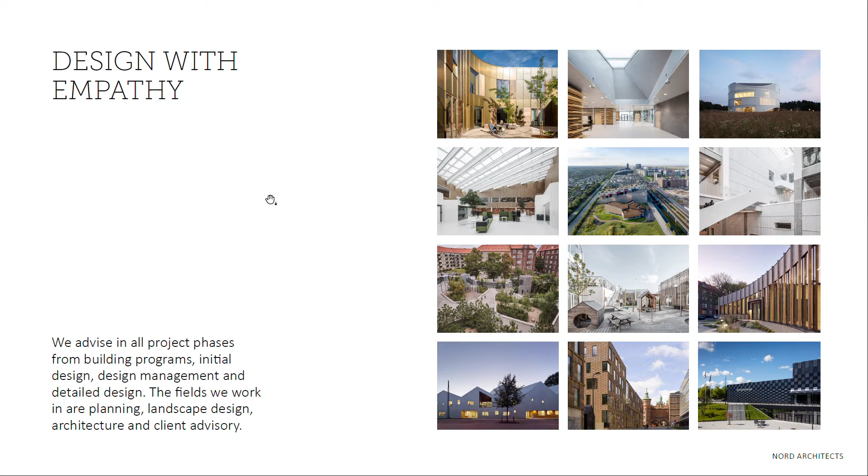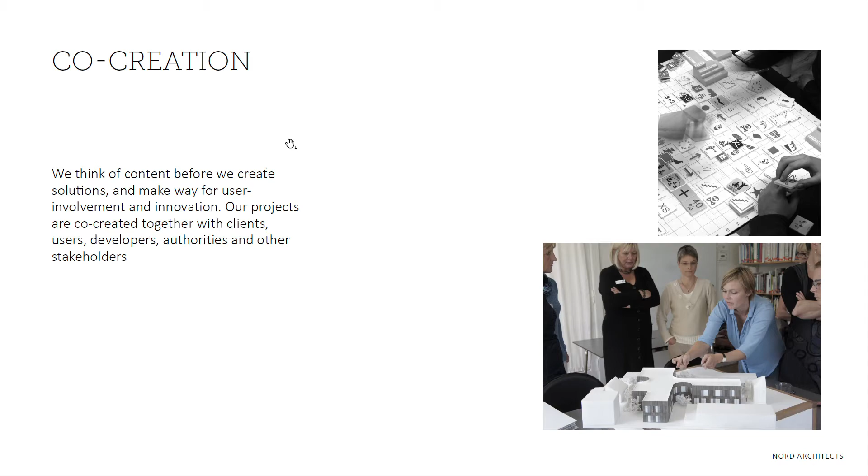We're a company based in Copenhagen, Denmark, and we try to design our projects with empathy. The way of doing that is that we try to involve stakeholders, users, relatives, organizations in the design process, and we developed special methods and tools to cater that process.

Denmark, small country in Scandinavia. We are a country with a strong public sector, and when you see what we spend our money on in the Danish society, it's mainly within the healthcare, education, and social sector. So it's within these fields that we feel it's a huge potential for doing architecture and new innovations.

Especially because when we see the aging population in Denmark and globally, we have to find new ways of catering our welfare services, building in new ways.

What's pressuring the welfare state at the moment is many factors: globalization, climate change, changes in demographics, but also a greater expectation for public and individual welfare. So the traditionally Scandinavian welfare model, where you have a strong public sector at the top and a private sector and a civil society, is gradually changing now into new alliances and new partnerships.

Also, when we see the architecture for the aging population, especially COVID-19 have sort of emphasized the need to do new innovations within the field.

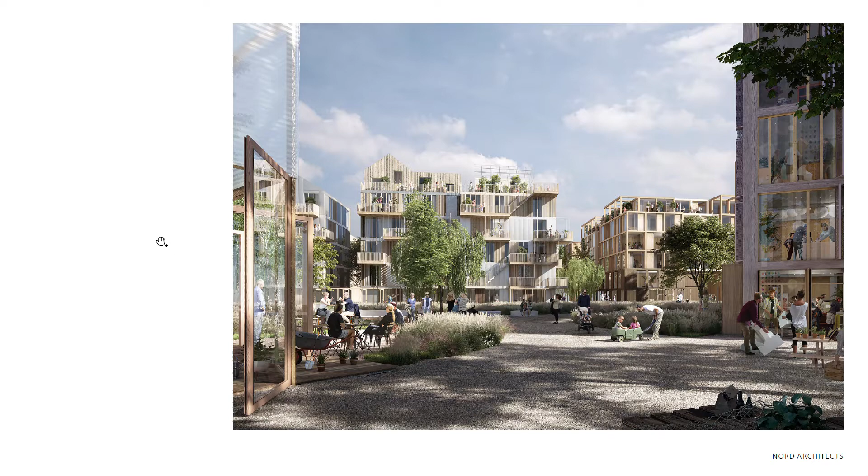And when we do urban planning or neighborhoods, we try to plan for intergenerational housing and also a plan layout that are age friendly and age integrated.

So we'll start telling about some projects which we call centers of excellence, that are meeting the demands of an aging population in different ways.

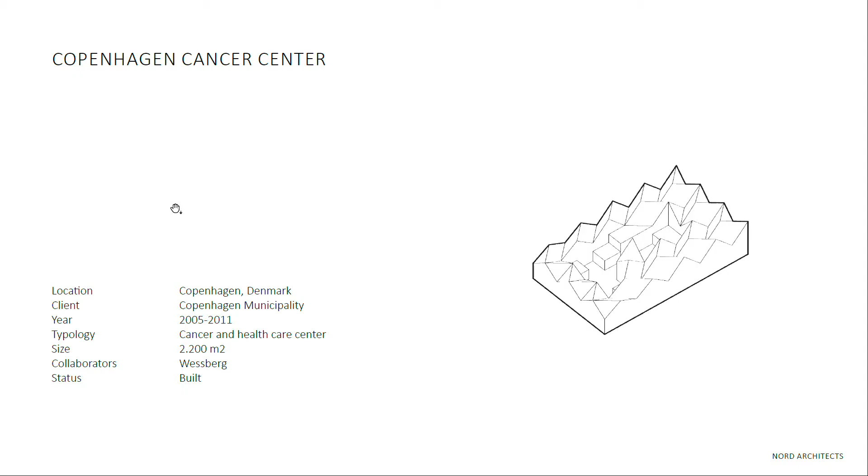The first project is one we made in Copenhagen, which is a health and cancer center. It's a result of a healthcare reform in Denmark in 2007, where rehabilitation processes were taken over by the local governments and municipalities. So this center here is providing the rehabilitation and training for elderly and cancer patients.

But what's interesting about it is that we have also outdoor facilities for training and recreation, but they are also accessible for other communities and neighbors and kindergartens and so on.

The center itself is an example of a new partnership between public, civic, and private sector. You have a long range of private enterprises doing counseling and so on. You have the municipal that are responsible for the rehabilitation, and you have a lot of people working volunteer from the civic society.

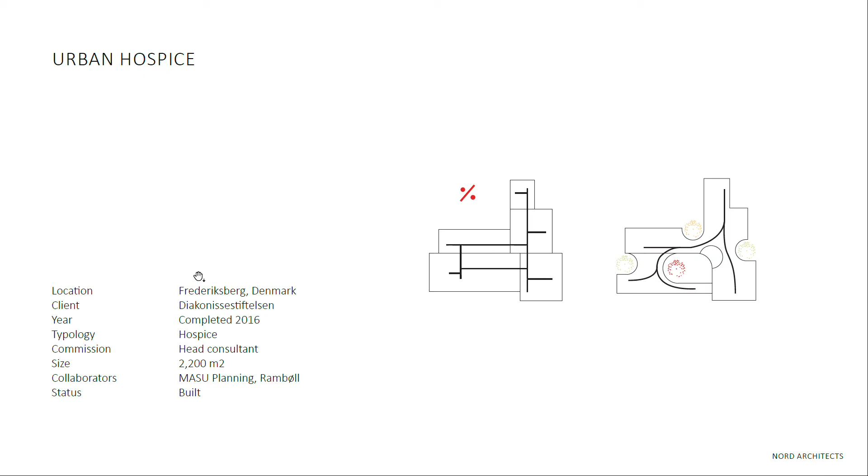Same thing for the next project, which is an urban hospice in the center of Copenhagen, which again takes the stigma out of the last days in your life, so that you can actually be in an urban setting at a villa road, and be close to your relatives and being met with dignity.

So this is also a result of these small centers of excellence that are popping up in Denmark.

The next couple of projects show another tendency in Denmark, where you see you cluster different functions together.

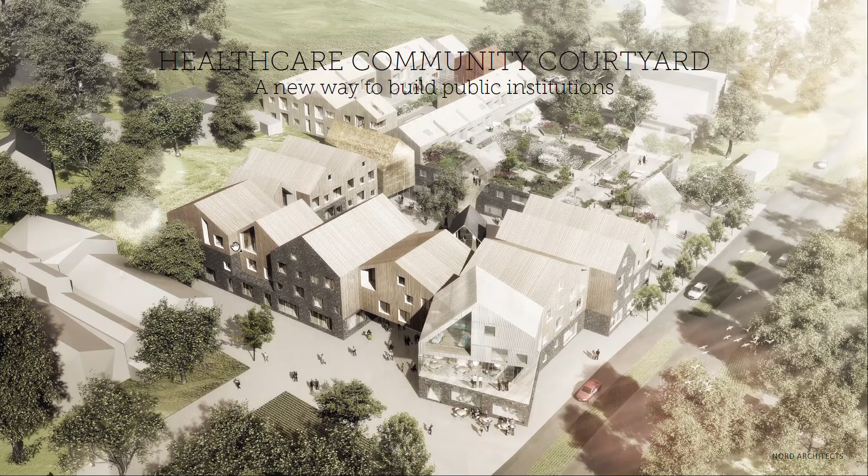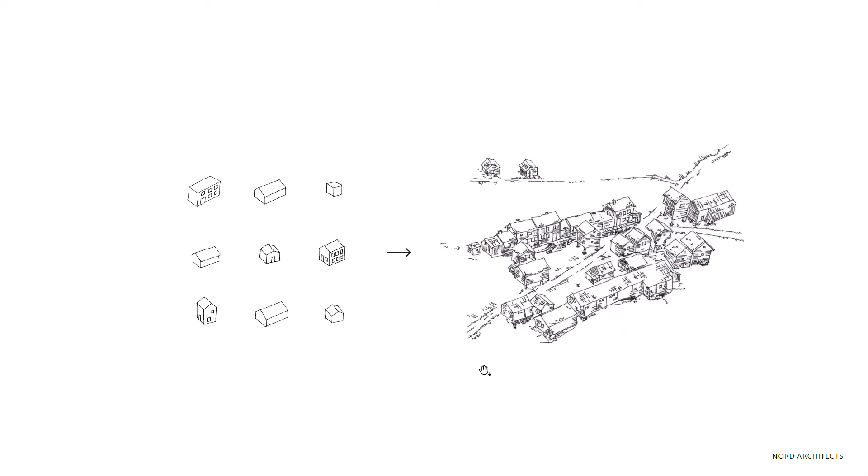This is a project actually in Norway we are just finishing, which contains long-term care homes, a doctor center, dentist center, childcare center, and so on. So it's an integrated typology with the city, where we were inspired by Norwegian typology of cluster houses, but we designed it like an efficient modern institution.

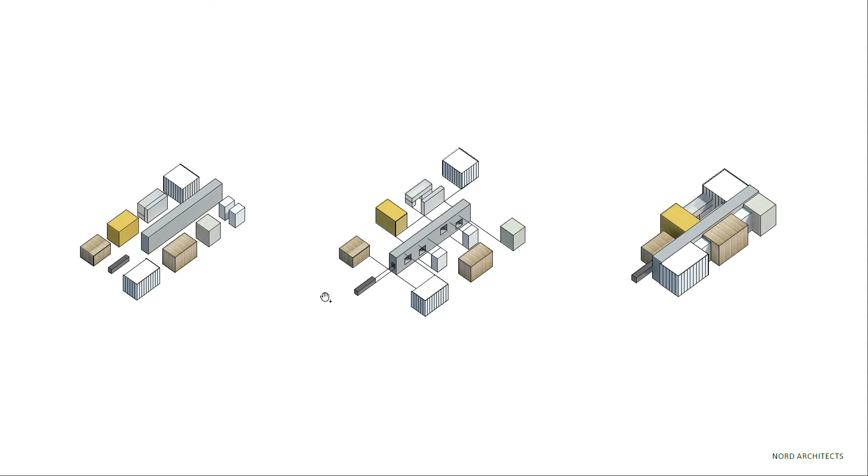So again, the architecture here in this low budget project is emphasizing the different functions that are meeting different demands, and also sharing facilities and creating professional synergies.

This is also a project in Norway that is also trying to combine different needs for the local area.

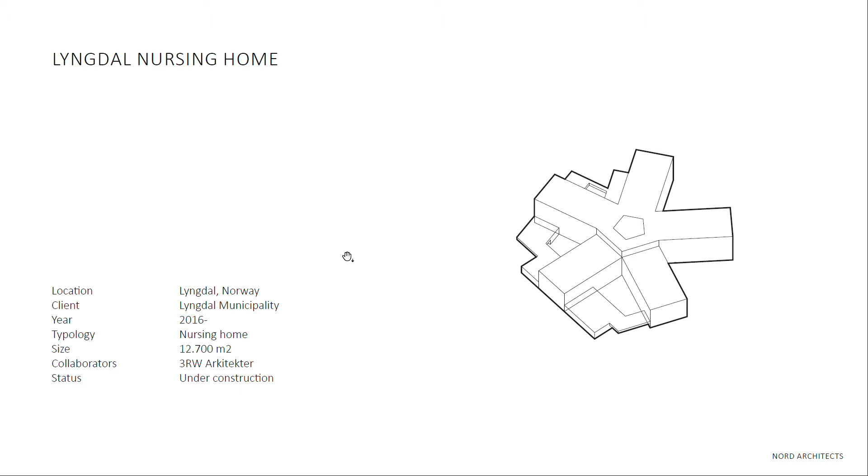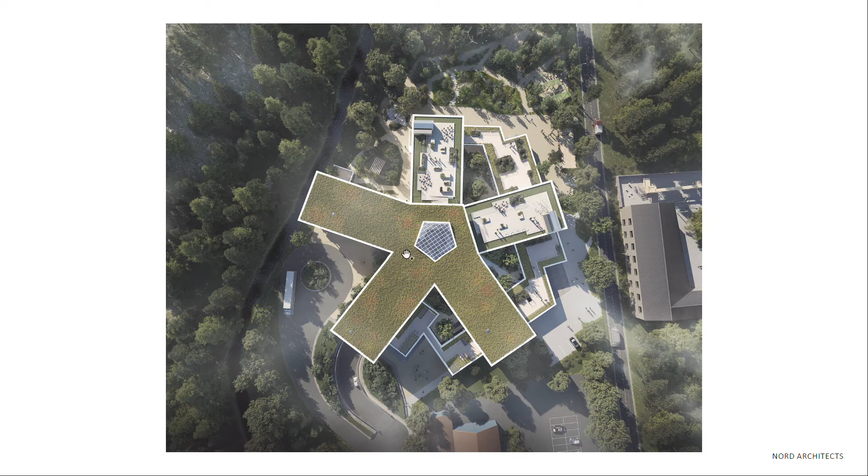So here you have a star-shaped building with a central atrium, where we have two branches here for dementia patients, two branches for normal long-term care units, and then you have one for senior housing, more fit elderly that can stay here.

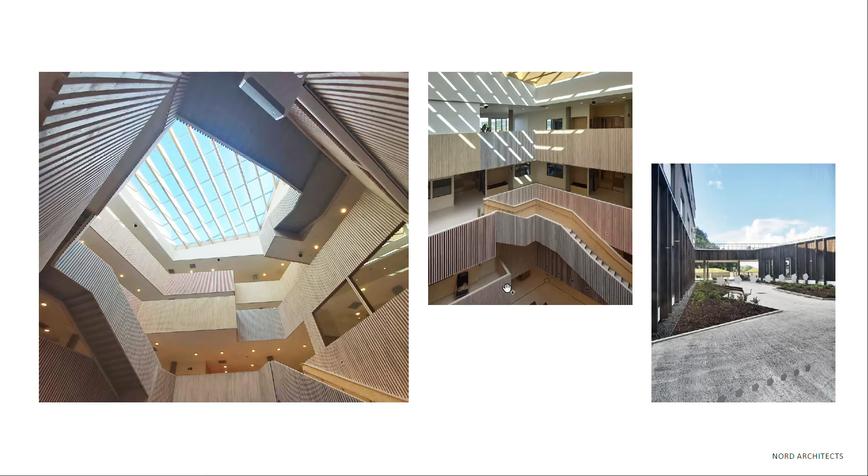This is also a project that is just recently finished, so these are fresh images from the site. As you can see here, enclosed courtyards and courtyards on rooftop terraces and so on.

Another tendency is that we see a lot of senior communities are being built in Denmark at the moment.

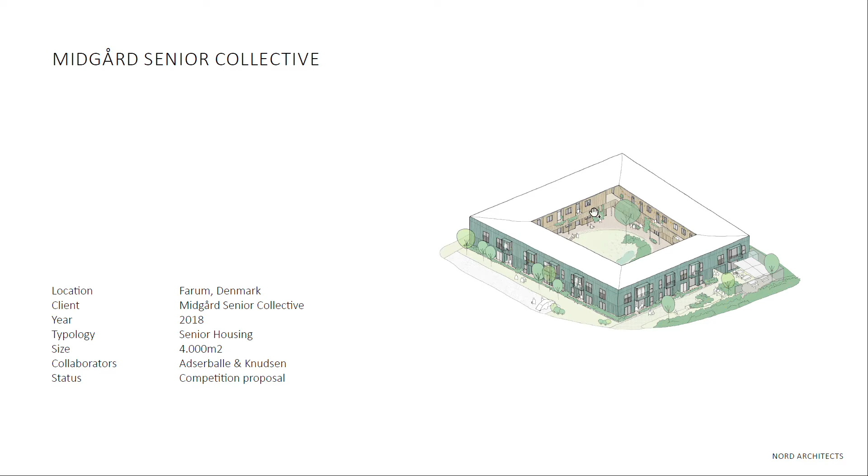People 65 plus have a need for smaller apartments, but they want more common facilities. So this is a type of project being built all over Denmark at the moment, where the priority is to have a community and get more larger common facilities.

So I will briefly tell you about 3 dementia villages that we are working on at the moment.

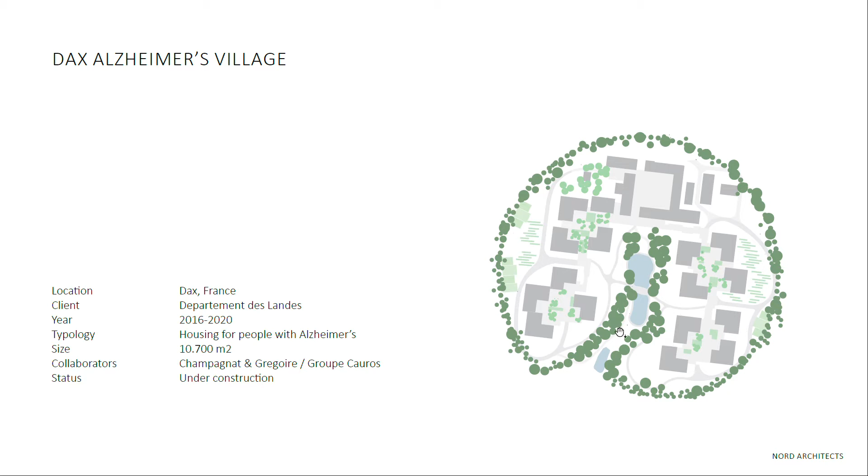We planned the area with beautiful pathways between the different housing units, and the concept here is to have 4 living clusters that are broken down into 4 units, and each unit has a common area and then individual apartments. And then we have this large common area, which is inspired by a French urban typology called a Bastide, where we have common facilities.

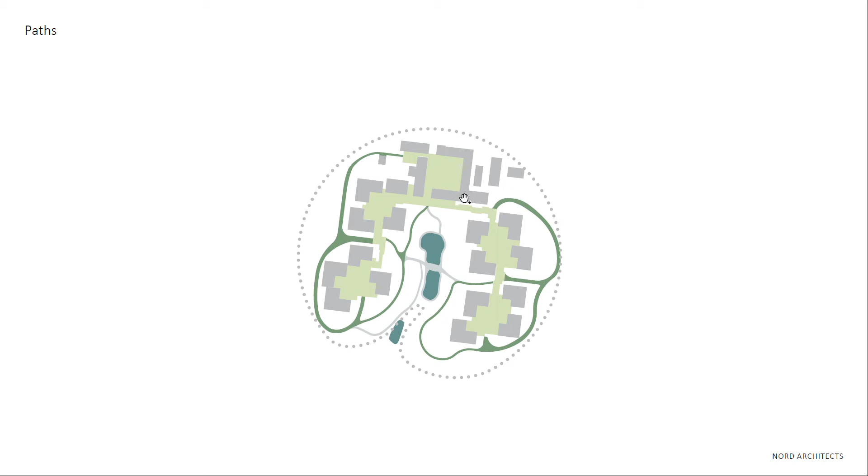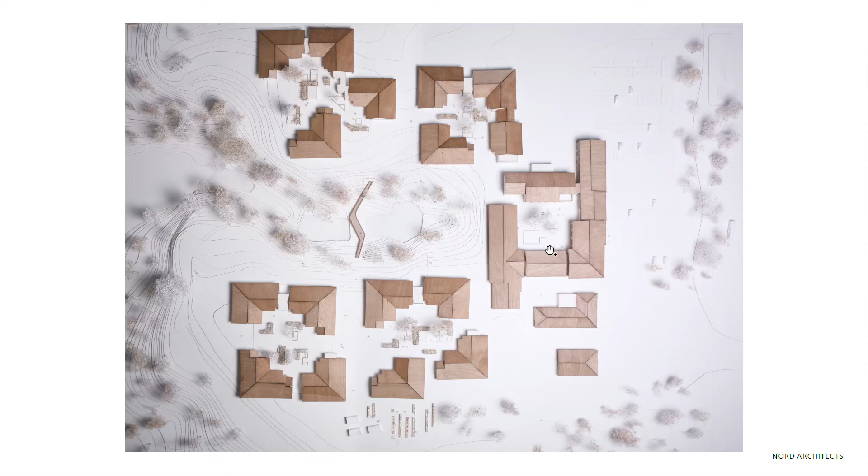The principle with this project is that you start to get a relation to the area before you move in, when your dementia is gradually developing, and you will have your doctor's appointments, cultural arrangements, and so on in this area. And also the neighboring areas are being invited in to take part in events and use the facilities here in the common area.

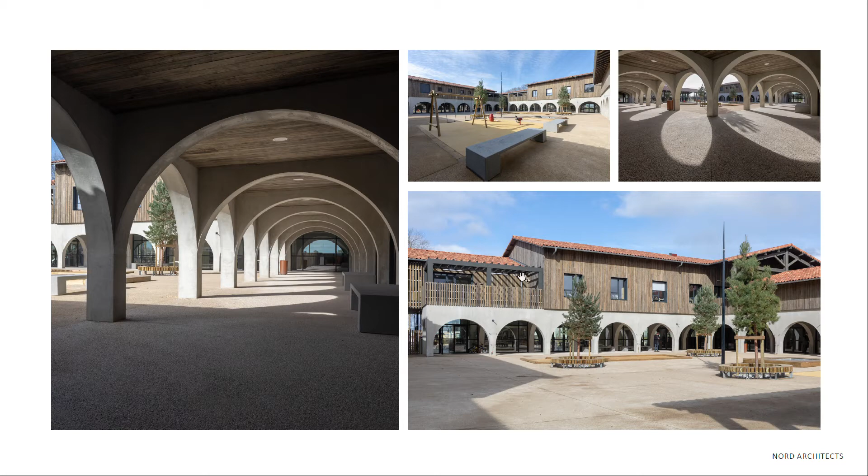And these are fresh, newly taken images from the finished project here. You can see it's still a building site, but a long range of functions are placed alongside the urban square.

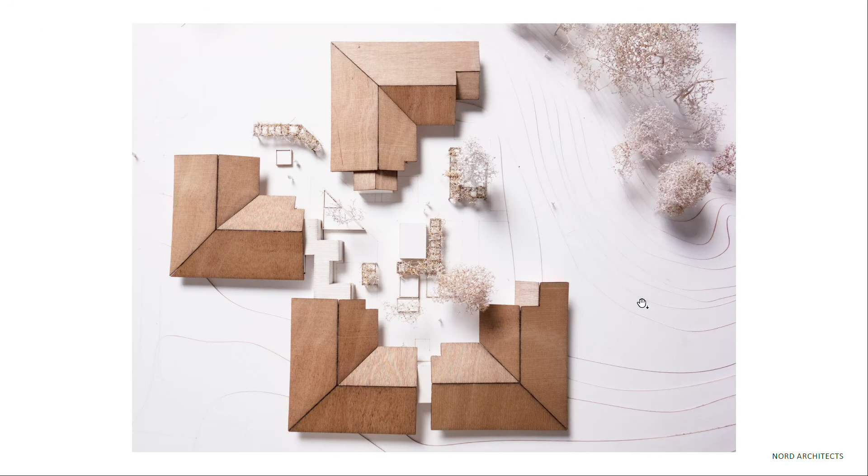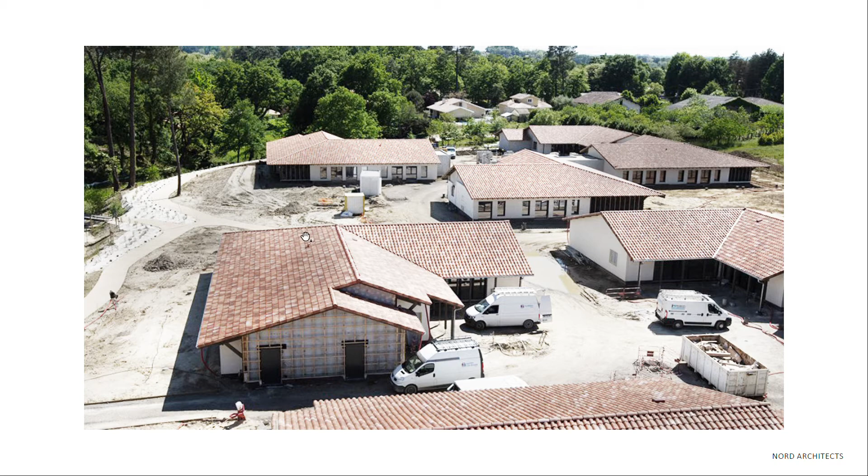And the small units are built with inspiration from a local building typology and with local materials, like these roof tiles and so on. So the elderly will definitely feel comfortable, in a recognizable environment for them. And I forgot to say that of course they have a wine bar in the Bastide.

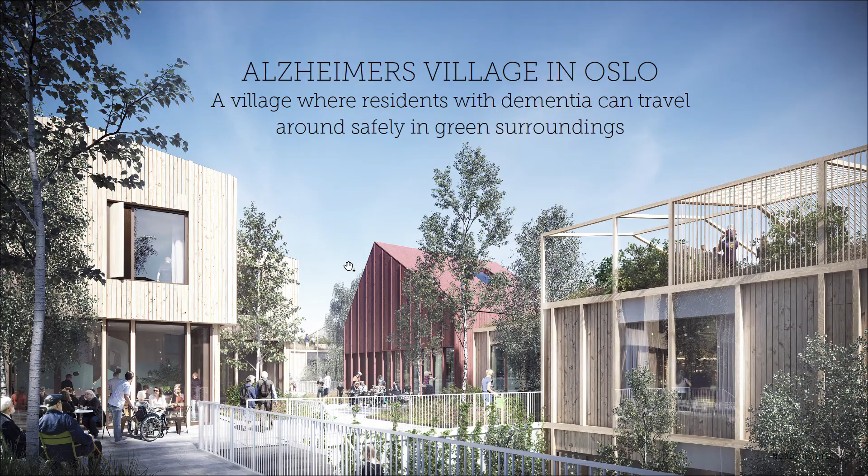Next project is an Alzheimer's Village in Oslo, Norway, that we are working on at the moment. And it's a different concept. It's one large building complex with different housing units. We have enclosed small courtyards.

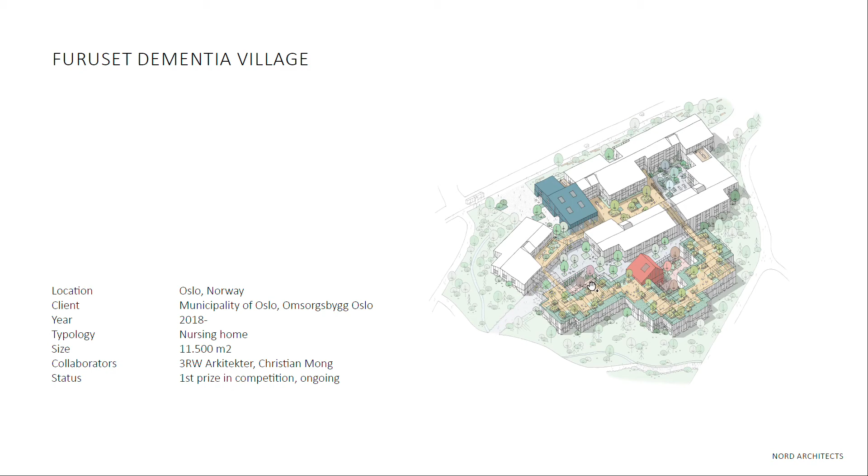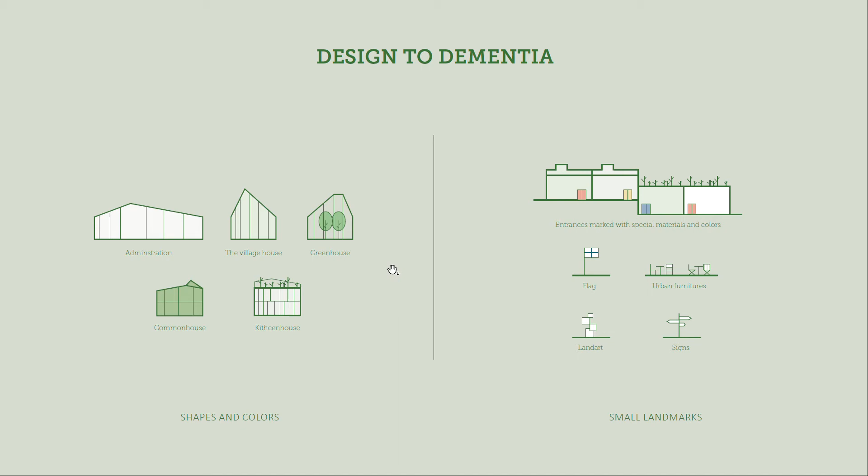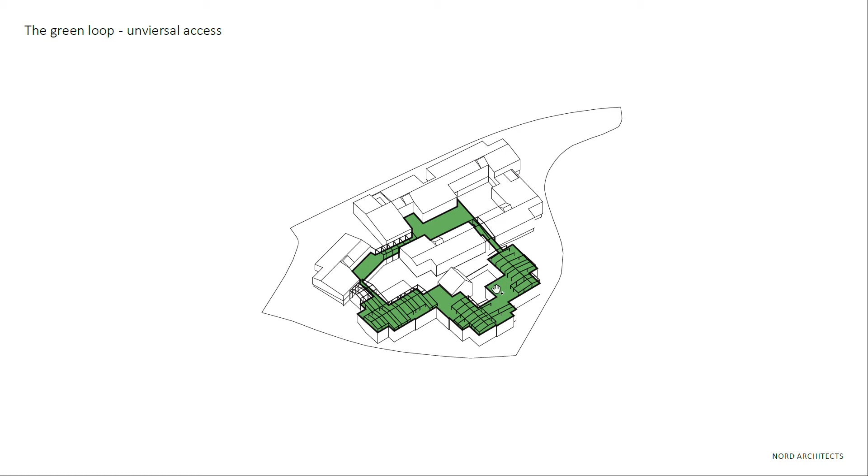We designed it with a great toolbox of knowledge on how to design for people with cognitive difficulties. As you see here, it's on a sloping site, which allowed us to create a looping rooftop terrace. And as you all know, the looping figure is a good figure for dementia patients because they can walk and walk.

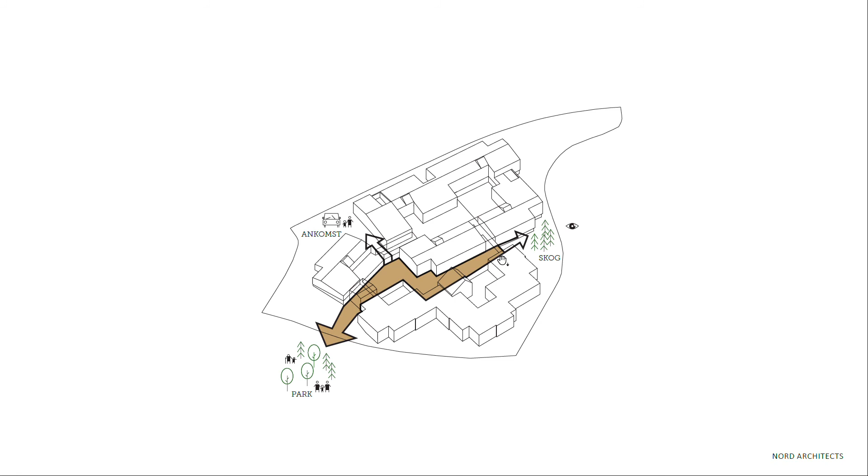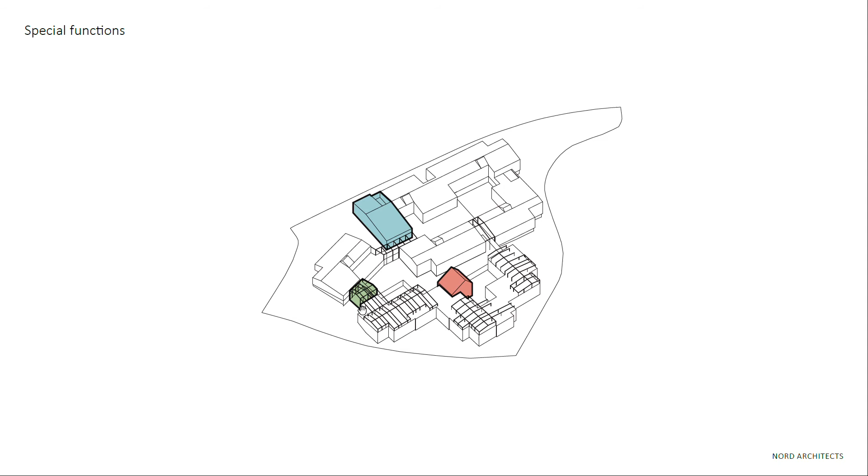This rooftop terrace engages the local community to take part in volunteering to maintain the garden aspects here. We also have a little street in the Dementia Village where we place restaurants, hairdressers, foot therapy, and so on. And we also have three signature buildings: a culture house, a greenhouse, and an administrational building, which also serve as wayfinding points for them.

Same concept here, where we have very homely units, a common area that caters to 8 apartments, and you can go directly into this enclosed secure courtyard.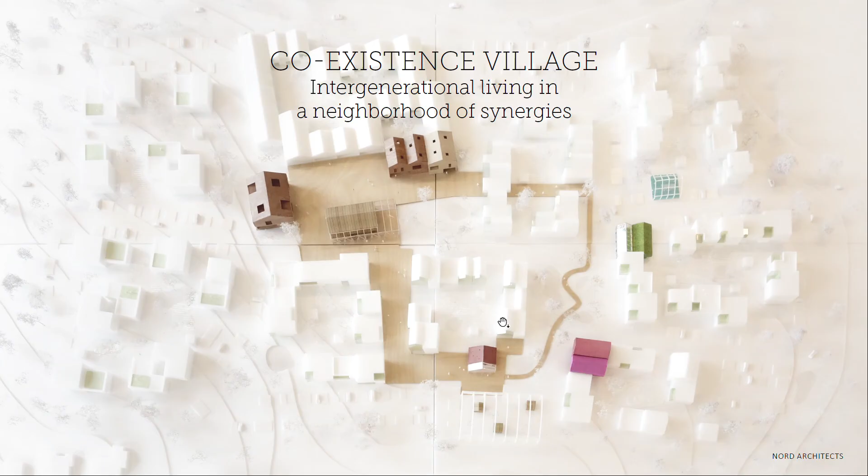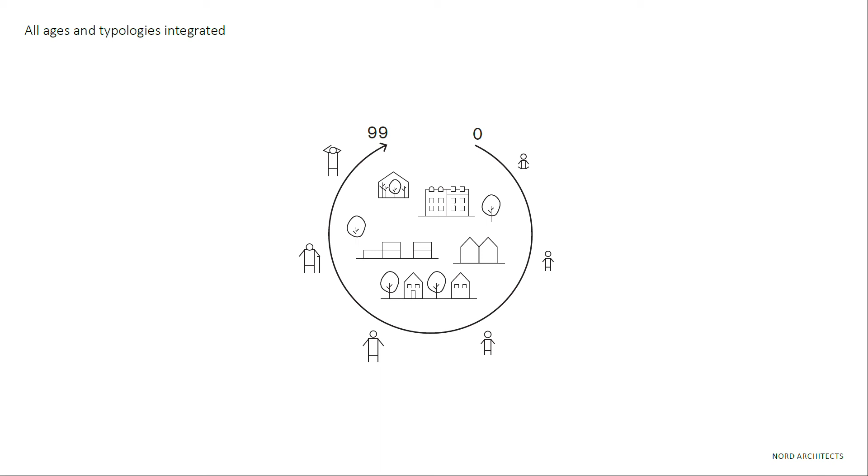The next project I'll tell you about is a project in Denmark called City for Life, or Coexistence Village. Again, this is a larger project where we try to integrate long-term care facilities, but also integrate them with other housing units for all age groups.

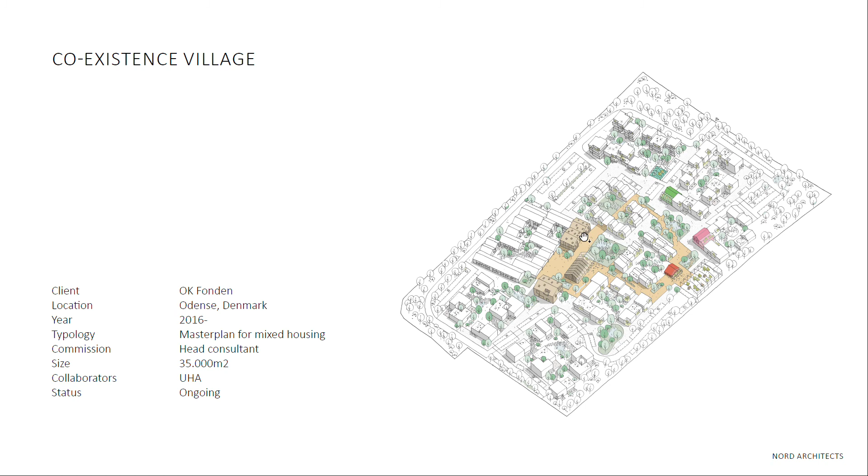So basically, we have a long-term care facility here, and then small clusters of housing for different age groups, all tied together with this looping figure in the center, which the elderly can use to navigate. What's special here is that each unit has a common facility that they share with the whole area, which also works as wayfinding points for the elderly.

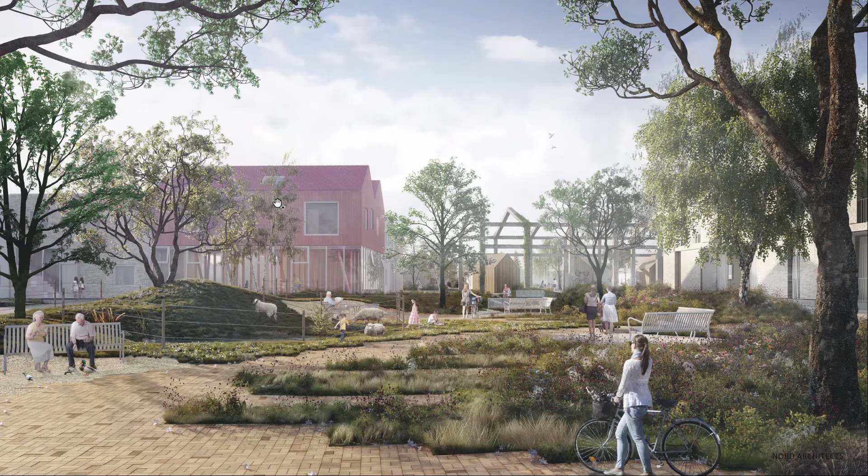So here you see the yellow brick road that we made, and again the different housing clusters with shared facilities. As you can see here, the shared facilities are signature buildings.

So again, this is about trying to plan for social sustainability, really. You have the care center, senior collective, age-integrated housing, transitional housing, which is housing for elderly that need a little bit of service, student housing, family housing, daycare institutions, and shops and some services.

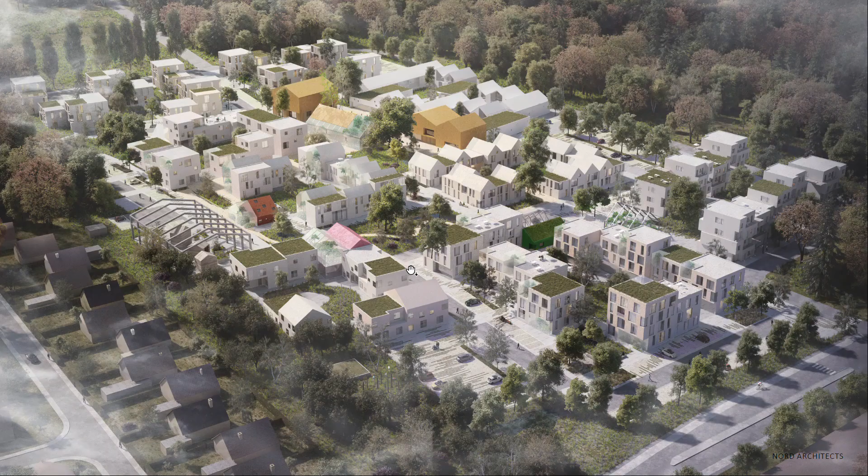So basically the whole area is about being age integrated and taking the stigma out of aging, and trying to create social synergies between the different housing clusters.